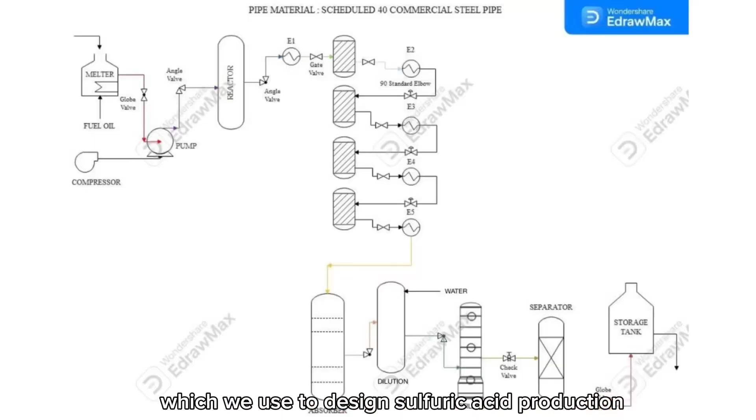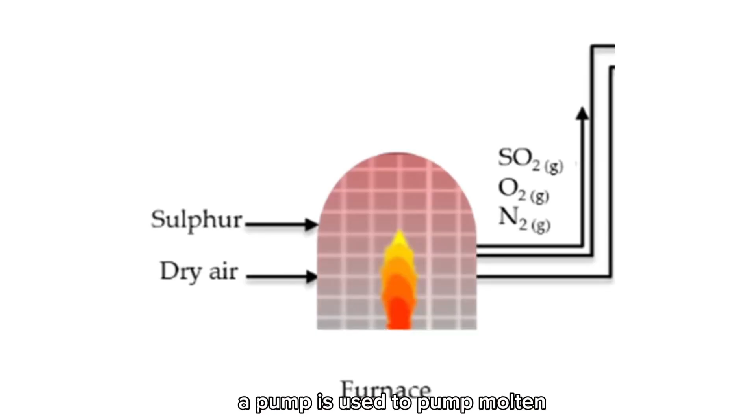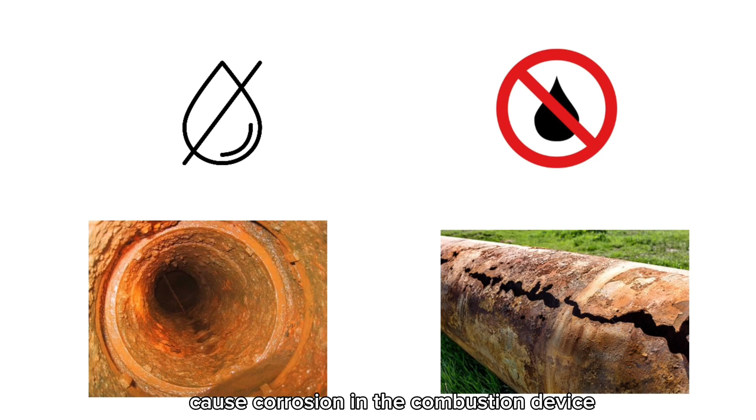Good afternoon. My name is Najiha, and today I will be presenting about the principle of chemical engineering, which we use to design sulfuric acid production. During this production, there are 5 main processes which we need to use in order to produce sulfuric acid. The first one is the preparation of sulfur dioxide. In this process, a pump is used to pump molten sulfur to the reactor and burn with dry air to produce sulfur dioxide. During this step, it is crucial to make sure that the air supplied for the combustion process is absolutely dry. Even small quantities of water can cause acid to form, which could eventually cause corrosion in the combustion device. Furthermore, a filtration step is required if the sulfur contains carbonous contaminant.

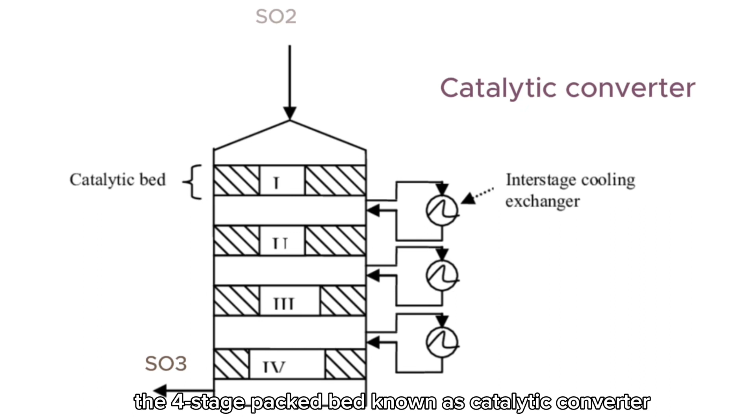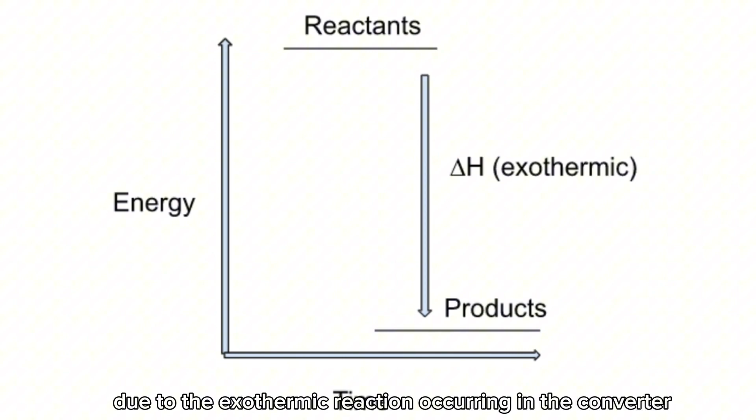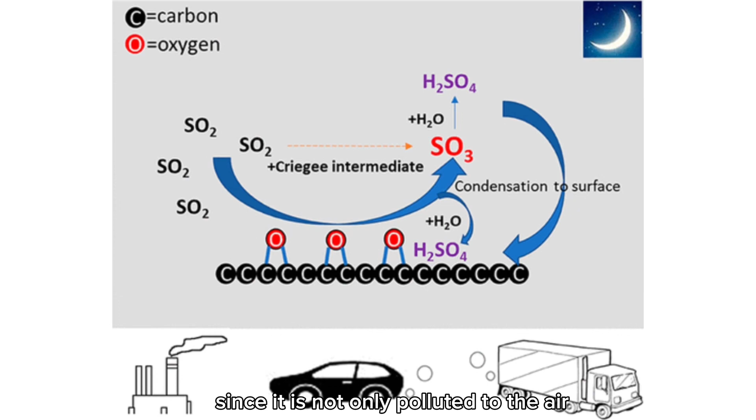The second process is the purification and oxidation of sulfur dioxide. In oxidizing sulfur dioxide to sulfur trioxide, the 4-stage packed bed known as catalytic converter is typically used for the contact process. A temperature increase during the reaction is anticipated due to the exothermic reaction occurring in the converter. In addition, it is crucial to keep the ideal temperature and pressure to ensure maximal conversion near the equilibrium condition, since the conversion from sulfur dioxide to sulfur trioxide is a reversible process. In this part, it is essential to keep sulfur dioxide from leaking into the atmosphere, since it is not only a pollutant to the air but also a key contributor to acid rain. Double absorption during this process ensures that more sulfur dioxide is converted to sulfur trioxide and is therefore advantageous to us.

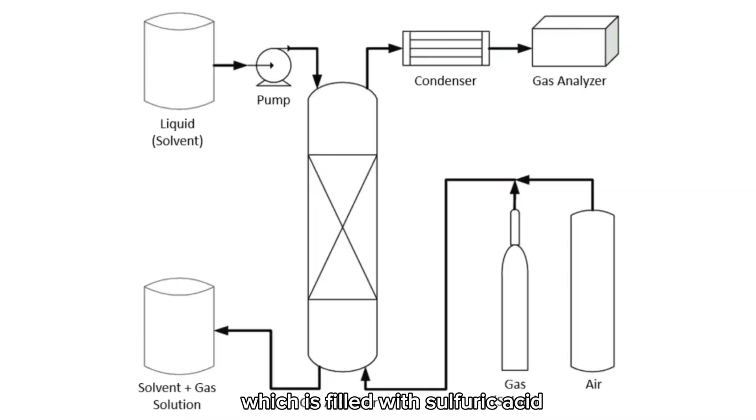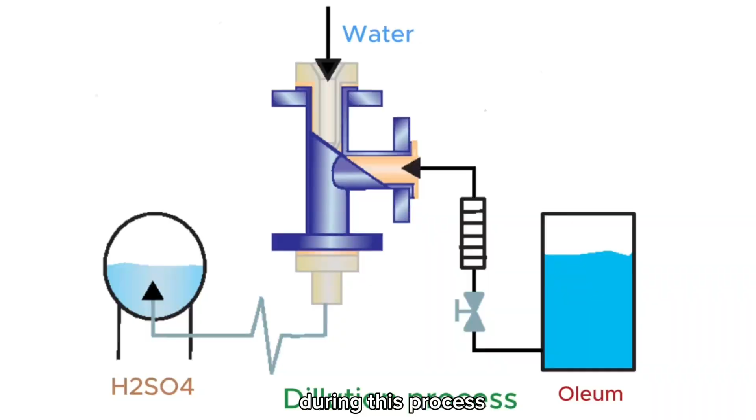The third process is the reaction of sulfur trioxide with sulfuric acid. During this process, the sulfur trioxide product will be fed to the main absorption tower, which is filled with sulfuric acid, and reacts with concentrated sulfuric acid to produce oleum. The next step is dilution of oleum. In this process, the dilution tank converts oleum to sulfuric acid. The resulting acid strength can be changed by adjusting the sulfur trioxide and the water flow rates.

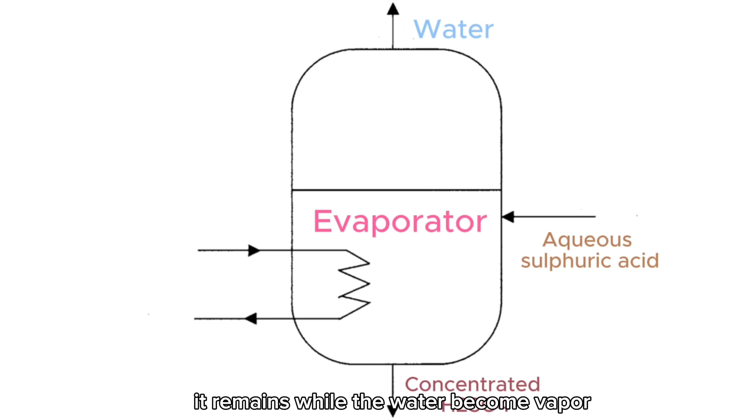And lastly, the evaporation of aqueous sulfuric acid. This process primarily involves the separation of pure sulfuric acid and water. During this process, water will be evaporated, but since sulfuric acid has a higher boiling point, it remains while the water becomes vapor, obtaining a more concentrated sulfuric acid in the product.

Come in. Hello, doctor. Please have a seat. Thank you.

So, doctor, basically on this fluid mechanics part, can you assist me on that? Yes, I think we can assist you for the fluid mechanics part of your project.

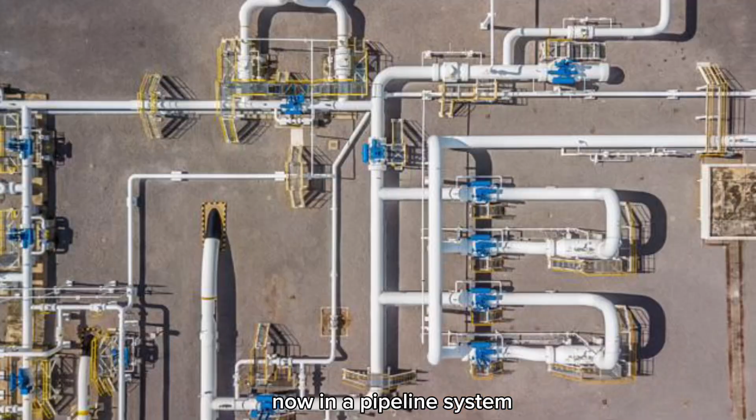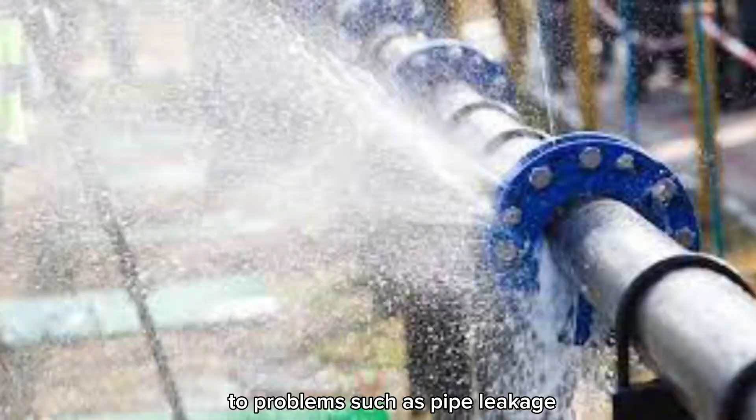Thank you. Hi, I'm Rosie, and for the second section of this project, I'll be explaining to you about our pipeline system and fluid mechanics. Now, in a pipeline system, what is the thing that we emphasize most on? Yes, we emphasize on pressure drop. Pressure drop is very important in making sure that our pipeline system works well. And with a good pressure drop, we can maintain a good efficiency of our production rate. And not just that, a good pressure drop will also prevent our pipeline system from being exposed to problems such as pipe leakage, pipe rupture, or pipe burst.

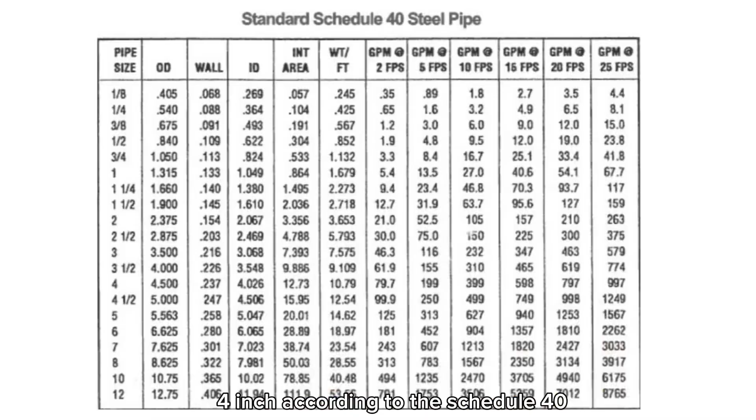So, therefore, what is our effort to sustain this suitable pressure drop? The first one is a constant velocity. So, in order to do that, we maintain the same cross-sectional area along the pipeline system, which is 4 inch according to the Schedule 40 commercial steel pipe. And when we are dealing with a system that constantly changes between liquid-gas and then gas-liquid from time to time, the density and mass flow rate of the gas will also change proportionally with one another. And by knowing this theory, we could sustain the velocity to be constant all the time.

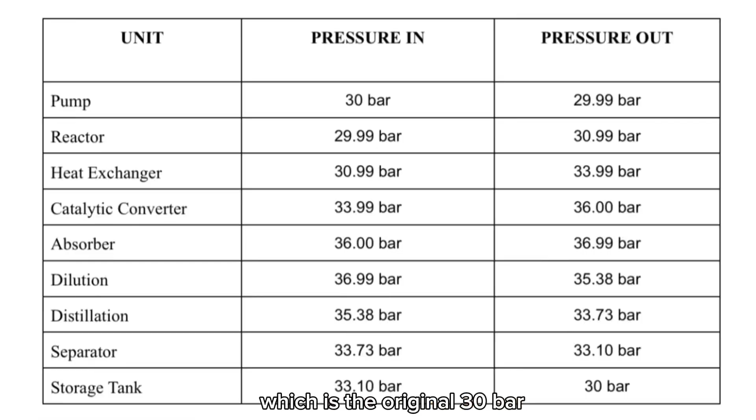So the initial pressure of our production is 30 bar, and it increases gradually due to the necessary conditions needed for the conversion of gas to heavier substances, such as from SO2 to SO3. We need a higher temperature to do that, therefore we need higher pressure. In the final unit operation, the pressure, which is originally at 30 bar, goes back to 30 bar in the storage tank. And that is the first part of fluid mechanics. I'll move on to the next person.

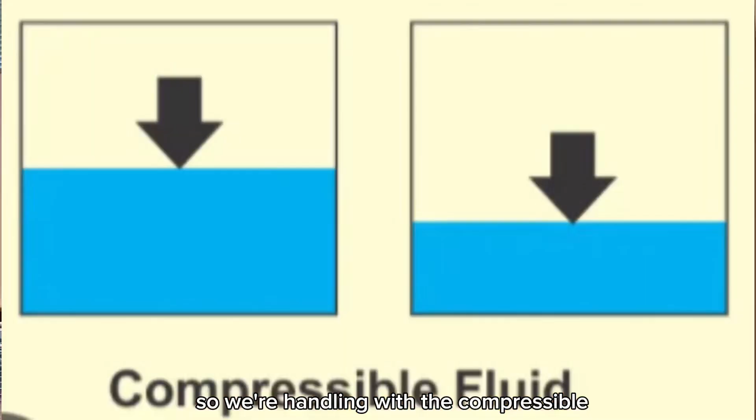Hi, my name is Iza and I will be explaining about the fluid mechanics. So in this line, we have 9 unit operations that have inlet and outlet pipes to calculate the pressure drop. So we're handling compressible and incompressible fluid. The pipes using the compressible concept are the blue, green, light blue and yellow pipes. Other than that, the pipes using the incompressible concept are orange, dark green, dark yellow, light red and purple.

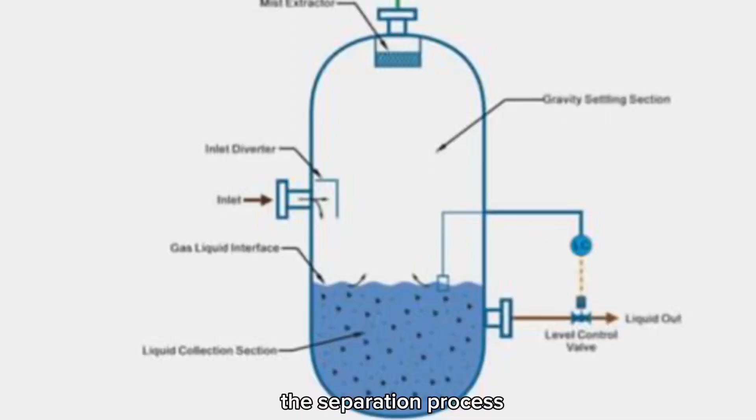So in this line, we're using the 90 long radius elbow as a better alternative for dealing with fast flow. So the first pipe, which is the purple pipe, we're using the centrifugal pump as it is capable of pumping both hazardous and sensitive fluid. So components we're handling in this plant are sulfur liquid, oxygen, sulfur dioxide, sulfur trioxide, oleum and also concentrated sulfuric acid. For the transportation strategy for the main product, the concentrated sulfuric acid has to undergo the separation process via separator to remove the unwanted component from the gas mixture. This process is crucial as it can affect the quality of the final sulfuric acid.

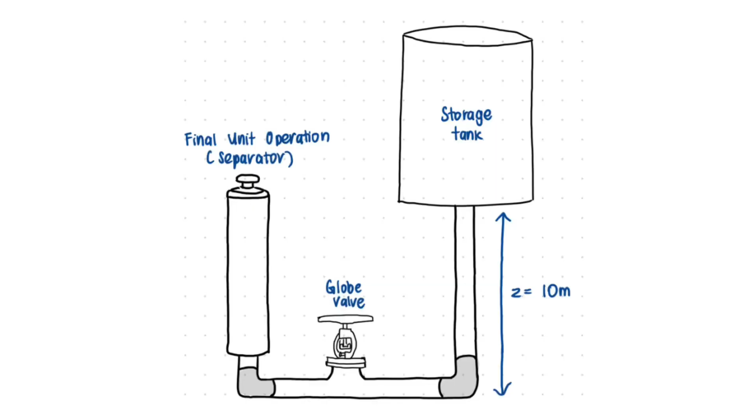So in this plant, we're using small and long uninsulated pipe to allow a bit of heat release to maintain the desired temperature. We're using commercial steel pipe as it can resist corrosion better. And after the sulfuric acid exits the separator, it will go to the storage tank that is made of commercial steel. Other than that, a heating system and thermally insulated walls are implemented to maintain the desired temperature and, most important thing, to ensure a safe and better sulfuric acid plant.

Come in. Hello, doctor. Please have a seat. Yes, thank you.

So, what are your findings and what can you conclude from this project? First and foremost, the basics were led by Principles of Chemical Engineering, where the foundational knowledge enabled us to navigate the intricacies of sulfuric acid production, a compound of significant industrial importance, renowned for its versatile applications ranging from wastewater treatment to material processing. Building upon this, the insights gleaned from the chemical engineering fluid mechanics part played an important role in addressing the fluid dynamics within the plant.

The pressure drop from one unit operation to another unit operation is very important, and that is mostly where we have to calculate the pressure drop so that the pipe does not burst during any operation that is done.

Wow, what a great job. I hope you can keep this momentum throughout your internship. Wow, what a wonderful week that I have gone through for my internship. This first week taught me a lot of lessons, and I hope I'll continue the remaining 7 months with this spirit.